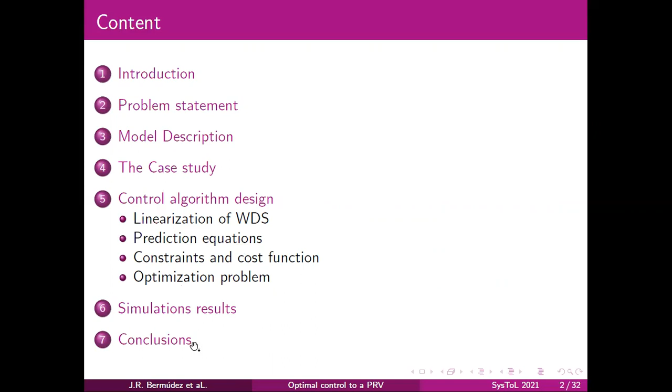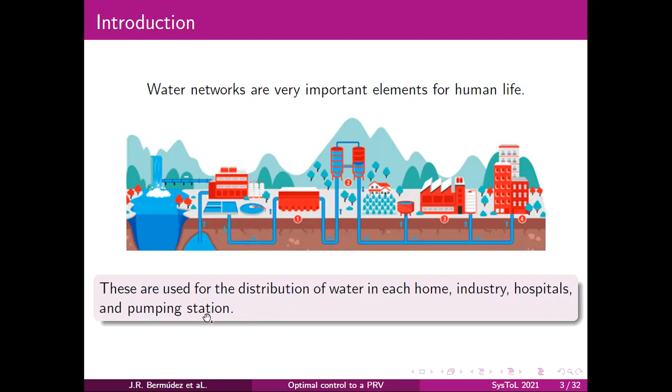In the introduction, water distribution systems are a connection of pipes to transport different kinds of fluids. The proper functioning of this system is very important because these are used for the distribution of water in each home, in industries, hospitals, and pumping stations. Frequently, the problems in this system are leaks generated by the water hammer effect, leakage due to pipe wear, and leaks due to overpressure in the system.

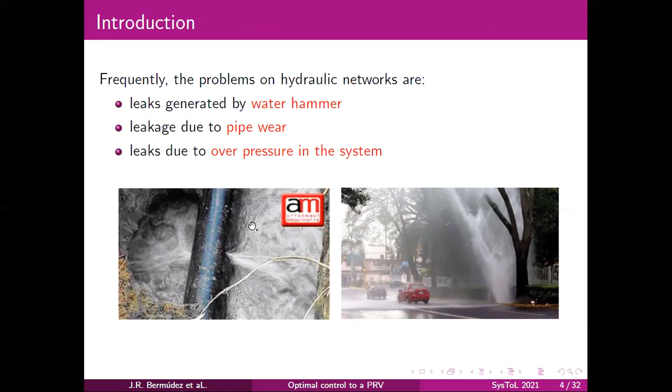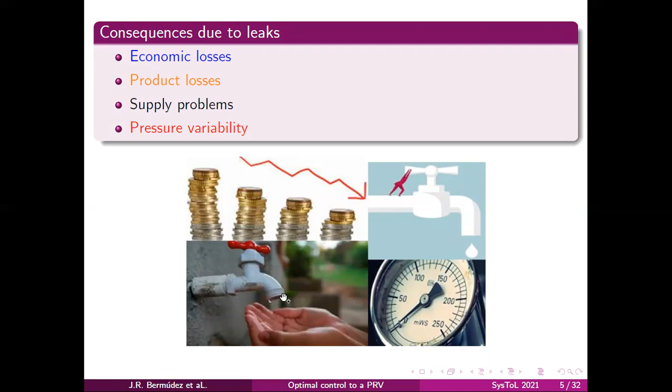This picture represents a leak in a city. The principal problems of leaks are economic losses, product losses, supply problems, and pressure variability. For this reason, monitoring and control in hydraulic network systems is important to maintain the pressure and flow at their demand values.

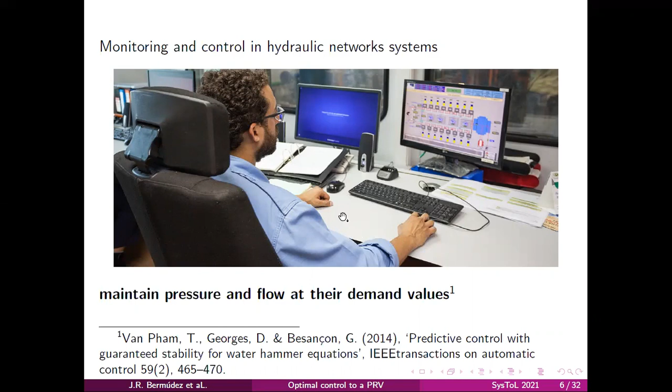On the other hand, what is the problem statement? The lack of management in this system causes overpressure in some parts of the network, causing leaks and problems in the demands. A simple solution could be to reduce the pressure in the system with a control valve. However, this will affect the demand. For this reason, an optimal solution is proposed to find a trade-off between maintaining the water supply demand and reducing loss due to leaks.

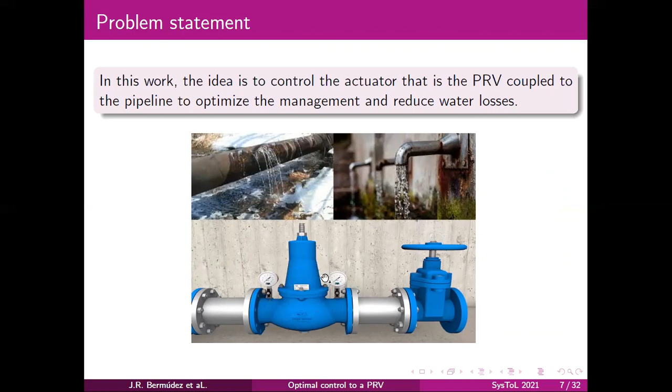A control valve can be represented by this picture. It has a pressure at the inlet, at the outlet, the flow through the valve, and the parameter to adjust the pressure, in this case, the parameter R. The dynamical model of this valve is given by this equation, where H represents the pressure, Q are the flows, the parameter R, and E represents the output speed of the water through the valve.

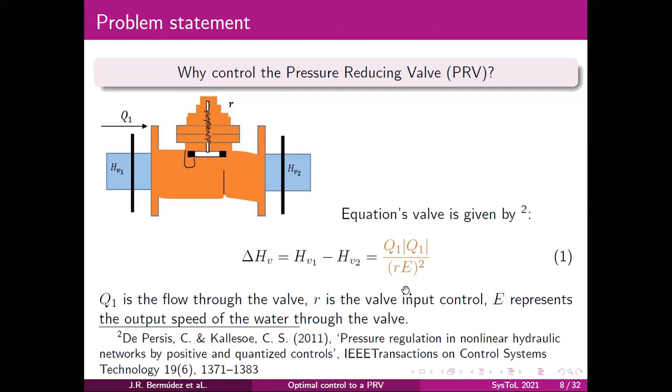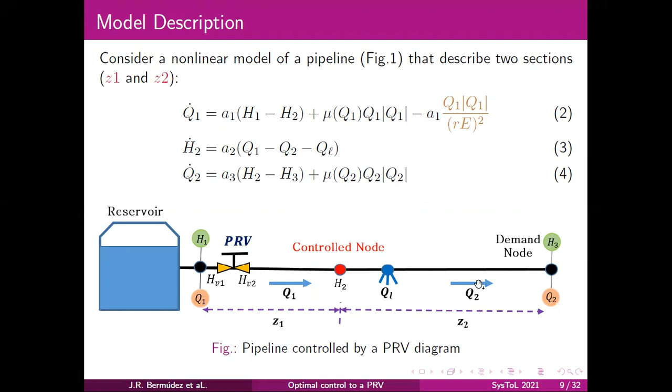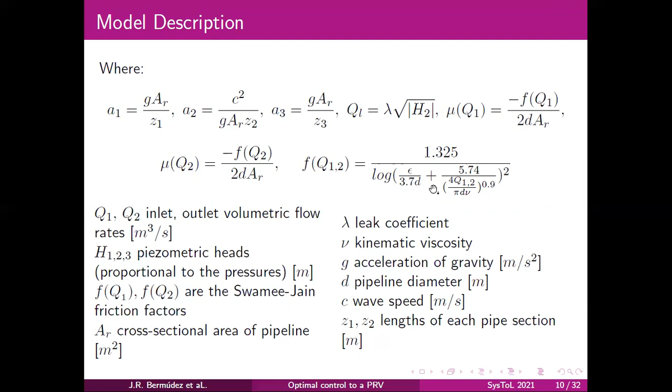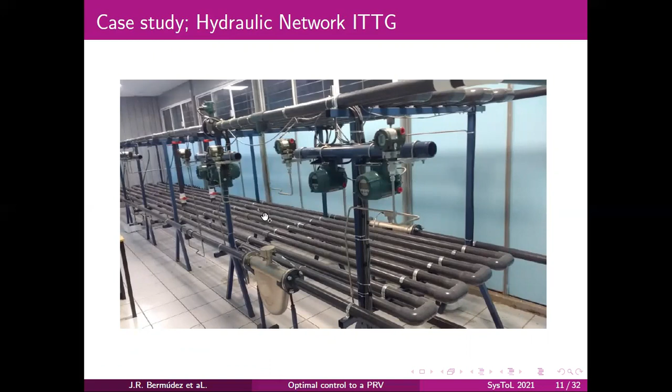These parameters are given by these equations, for example, the gravity, the area, the length of the pipelines, and the friction factor. It's important to mention that the previous diagram represents the real system, built in the hydroinformatics laboratory at Tecnológico Tuxtla Gutiérrez, Mexico. It's instrumented with pressure sensors, flow sensors, and valves to simulate leaks. To reduce a leak, the following control technique is proposed.

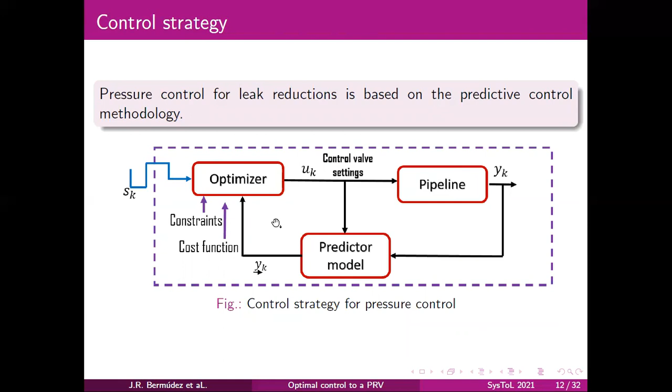Now, what is the control strategy? An MPC controller is proposed to find the optimal valve input to the system, where the input, in this case U, and output enter a prediction process to obtain the future output. The optimization is a cost function that penalizes the error of the future output with respect to this reference. This strategy is given by these phases: linearization of the water distribution system, obtaining prediction equations, definition of constraints and cost function, and definition of the optimization problem.

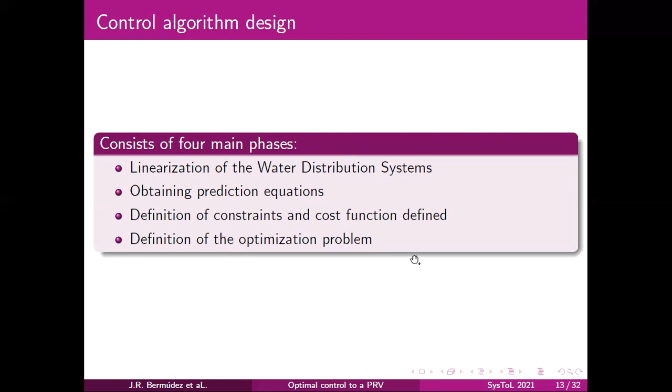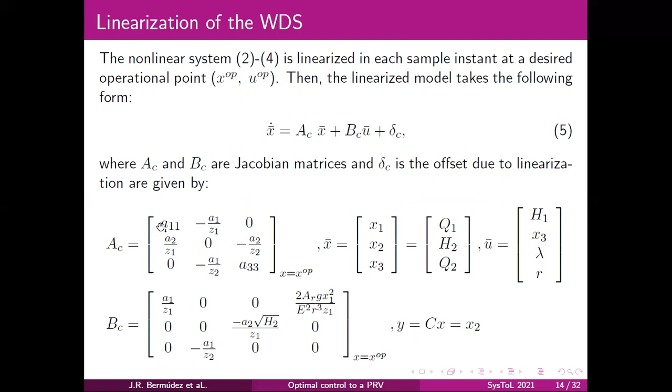For this strategy, the previous nonlinear system is linearized at each sample time to find the operating points, and the linear system is given by this equation and these matrices. This vector represents the states, and this vector represents the inputs, where a11 and a33 are given by these equations, and the delta parameter represents the difference between the nonlinear system and the linear system.

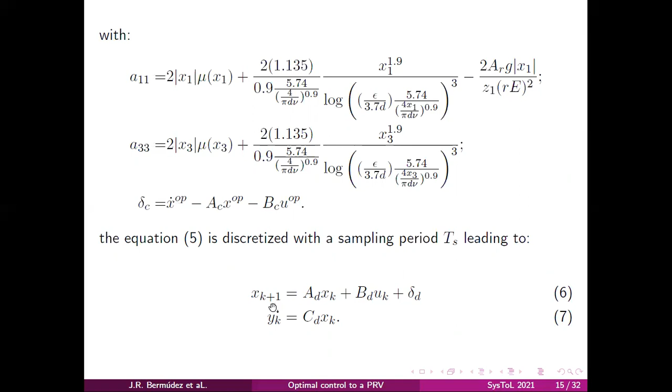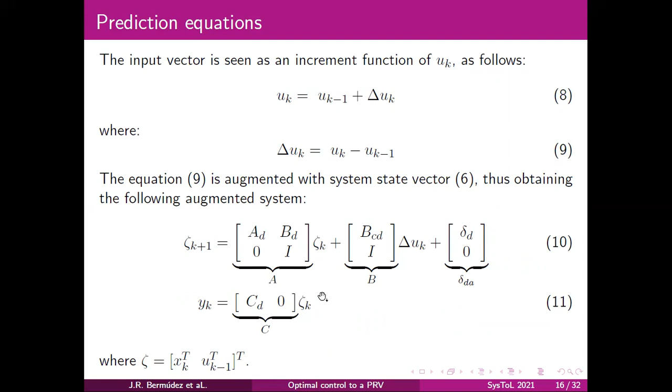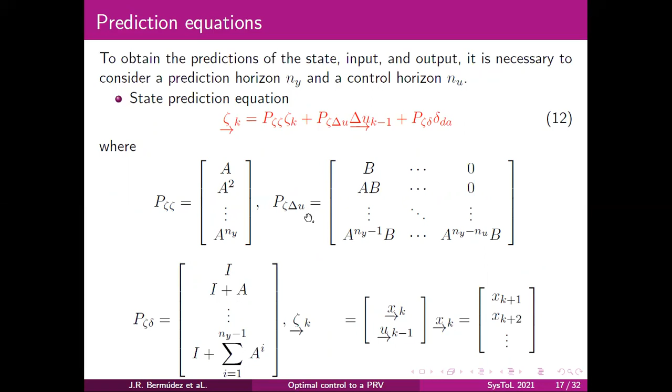Now, the state prediction is given by this equation, where P represents these matrices. The output prediction is given by this equation, where P represents this equation, and this vector represents the offset of the system.

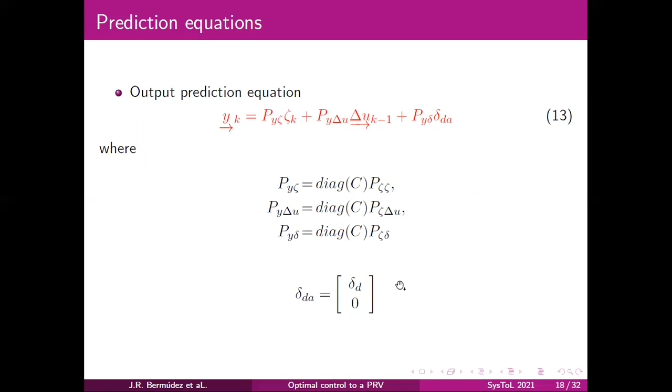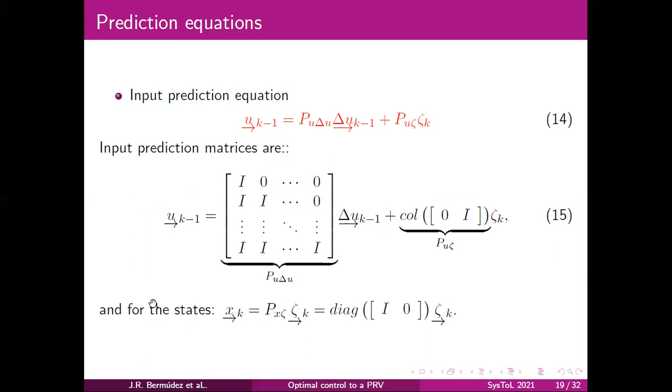The input prediction is given by this equation. Input prediction matrices are this equation, and for the states is this equation. Therefore, the prediction equations are given by the 16, 17, and 18 equations.

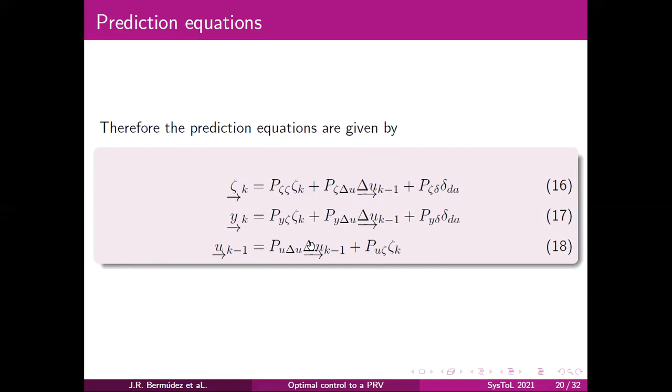After the prediction equation, the optimization process is considered. In this case, the cost function. The cost function to be optimized penalizes the future output error with respect to the desired output value R, and control input along the prediction and control horizon. The cost function is given by this equation, considering these weights.

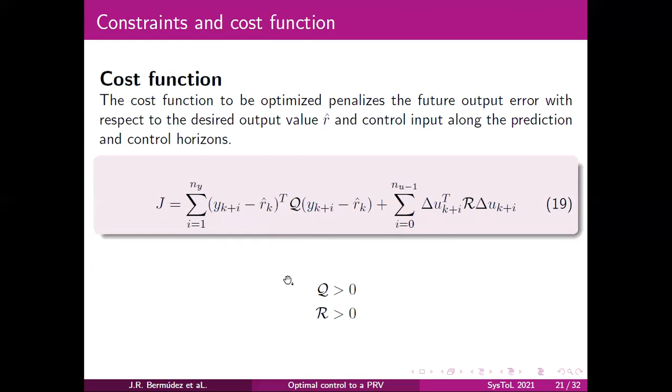The constraints are given by this equation. The constraints for the states, for the outputs, in the inputs, and the increment. In this case, the constraints take into account the physical sense of the system. For example, the minimum and maximum value of the states, in this case, the flow. For the outputs, the control pressure. And for the inputs, in this case, this equation, the minimum and maximum value of the opening valve.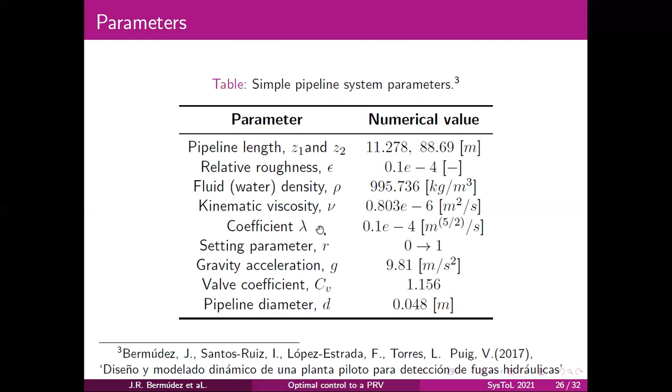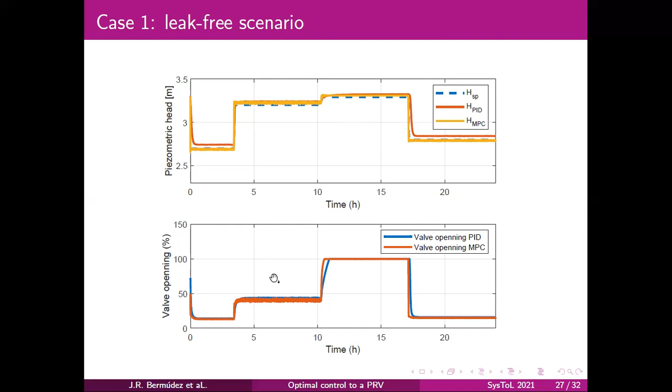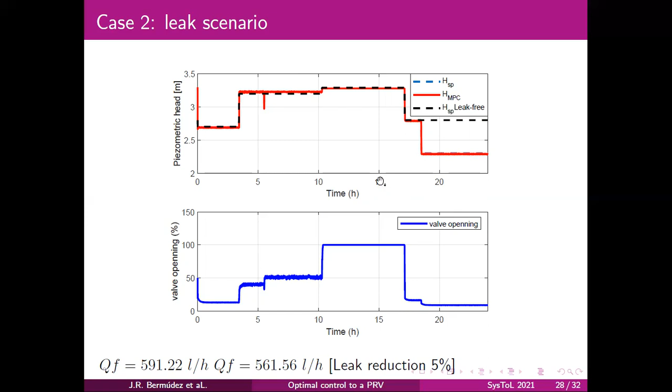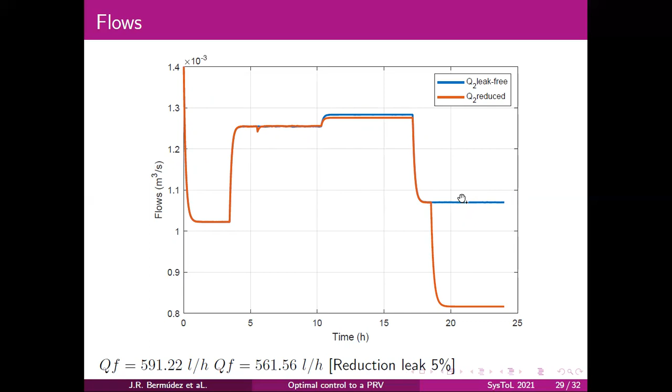It's important to mention that the pressure is reduced in the periods of minimum demand so as not to affect the supply. With this strategy, we have a 5% reduction in leakage. Now the flows. Finally, this graph shows the reduced demand flow due to the leak. The blue line is the leak-free flow, and the red line, the reduced flow.

The conclusions are: a model predictive control for the management and control of water distribution systems was presented in this paper. The main contribution was to consider a control strategy to find a trade-off between maintaining the water supply demand and reducing losses due to leaks. This problem was formulated as an optimization problem with the states, input, and output constraints.

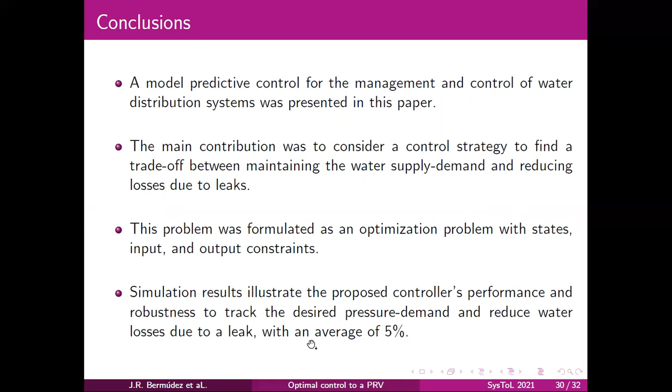Simulation results illustrate the proposed controller's performance and robustness to track the desired pressure demand and reduce water losses due to a leak with an average of 5%. Thank you very much.